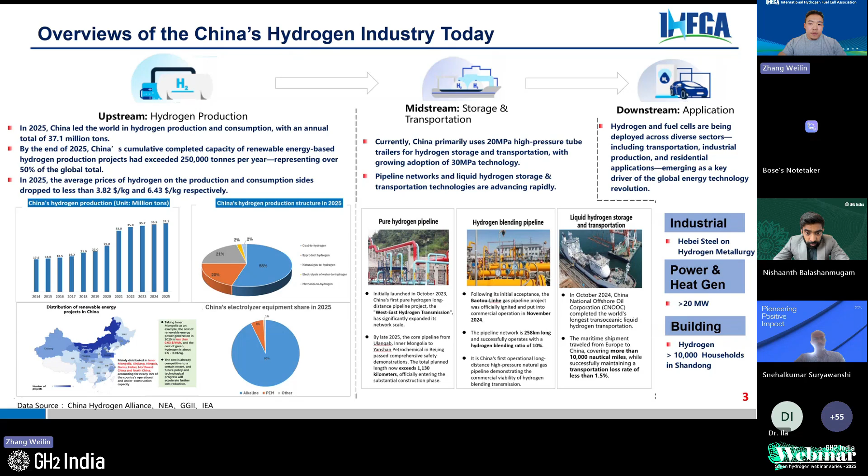In the storage and transportation side, currently China primarily uses 20 megapascal high pressure tube trailers for hydrogen storage and transportation, with growing adoption of 30 megapascal technologies. Pipeline networks and liquid hydrogen storage and transportation technology have advanced rapidly. On the application side, hydrogen fuel cells have been deployed across diverse sectors, including transportation, industrial production, and residential applications, emerging as a key driver of the global energy technology revolution.

Commercial vehicles represent the most critical and challenging segment of the decarbonization of the automotive industry. Fuel cell vehicles, with their extended range and rapid refilling capacities, offer the ideal solution for green, low carbon development in long-haul and heavy-duty transportation.

And here in China, we prioritize the fuel cell commercial vehicle development, emerging as the global leader in the transition. By the end of 2025, the cumulative fuel cell vehicle deployment reaches approximately 39,000 units, representing almost about 34% of the global total. And also in 2025, the sales of the FCVs in total reach over 10,000.

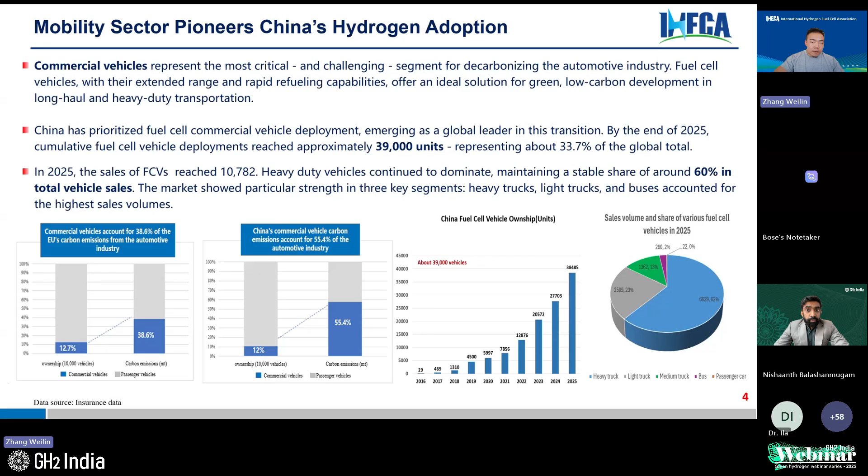Heavy-duty vehicles continue to be the dominator and maintain a stable share of around 60% in total vehicle sales. Also, in recent years, drawing from the experience of major initiatives such as the Beijing Winter Olympics back in 2022, and the Hydrogen into Thousands of Homes program, which is one of the major flagship projects announced here in China.

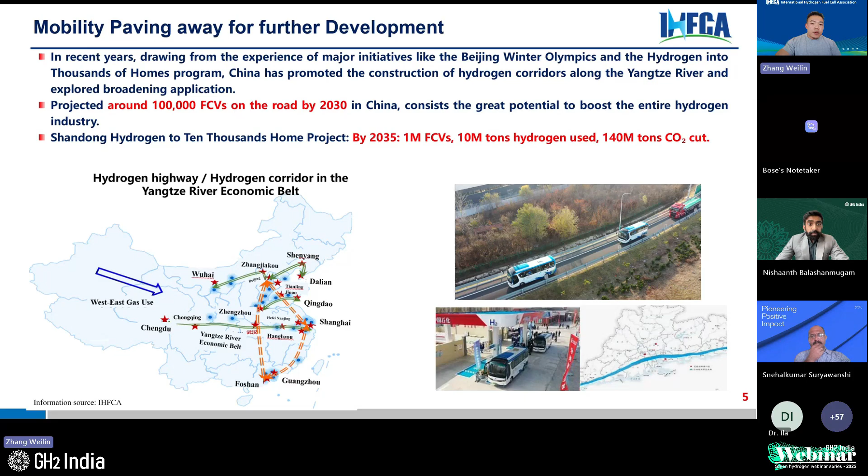We have promoted the construction of the hydrogen corridor along the Yangtze River and explored broadening applications, projecting around 100,000 FCVs on the road by 2030, with great potential to boost the entire hydrogen industry.

In the year 2020, five key ministries announced the notice of launching the demonstration application for fuel cell vehicles. This is one of the very important programs that leads the development of the fuel cell vehicle, and is the very important demonstration project that pretty much helped develop the fuel cell vehicle here in China as it is now, which I will get to with all the details in future slides.

As of early 2026, the participating demonstration city clusters I just introduced have deployed around 27,000 fuel cell vehicles, representing the vast majority of the nation's total deployments. By the end of 2025, the fuel cell vehicle demonstration city clusters consist of 5 city clusters across 44 different cities, and it continues to grow, continuing localized R&D efforts and massive investment momentum, creating powerful synergies.

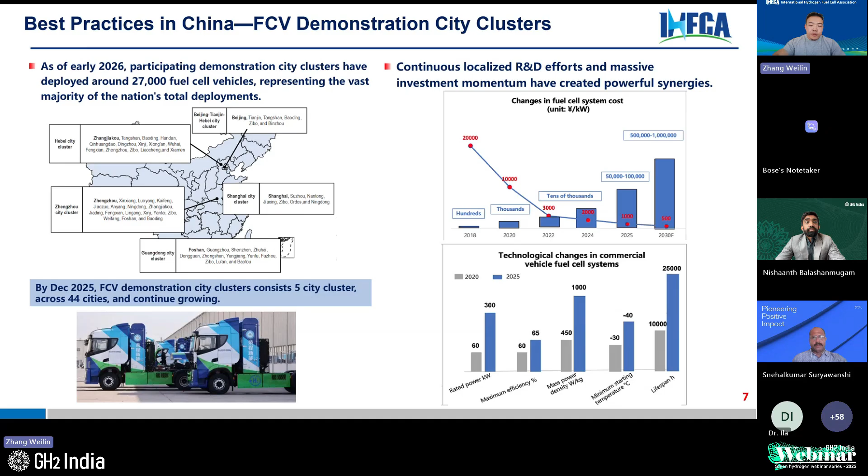The fuel cell system costs have dropped significantly starting in 2020. Also, the technologies in the commercial vehicles field have grown rapidly. For example, parameters such as mass power density or minimum starting temperature have all grown very rapidly, thanks to the demonstration program.

Also, a new round of hydrogen industry development support policy in China was introduced at the same time as the 5-year plan, just last month. As I mentioned in the last webinar, on March 16th, 2026, the China Ministry of Industry and Information Technology, along with the Ministry of Finance and the National Development and Reform Commission, jointly issued the notice on carrying out the comprehensive hydrogen energy application pilot work, marking a major escalation of national support for hydrogen energy industrialization.

There are 6 application tracks. First is fuel cell vehicles, and also green ammonia and methanol, hydrogen-based chemical feedstock substitutions, green steel or hydrogen metallurgy, and also hydrogen blended combustion, and innovative application scenarios.

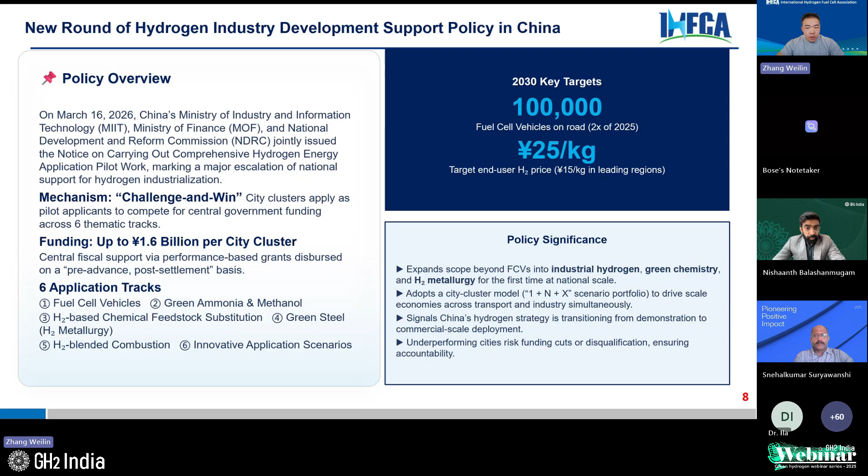There are two major goals by 2030. First is the target of 100,000 fuel cell vehicles on the road, which is twice the target we set in 2025. Also, the target end-use hydrogen price will drop to 25 RMB per kilo.

I would just take a couple minutes to briefly introduce our organization, the International Hydrogen Fuel Cell Association. The IHFCA was officially established in July 2022, and currently we have 111 members from 22 different countries and regions. Over 70% of them are hydrogen and fuel cell companies, and almost 30% are organizations, research institutions, or universities. We're focusing on hydrogen energy, fuel cells, and fuel cell vehicles.

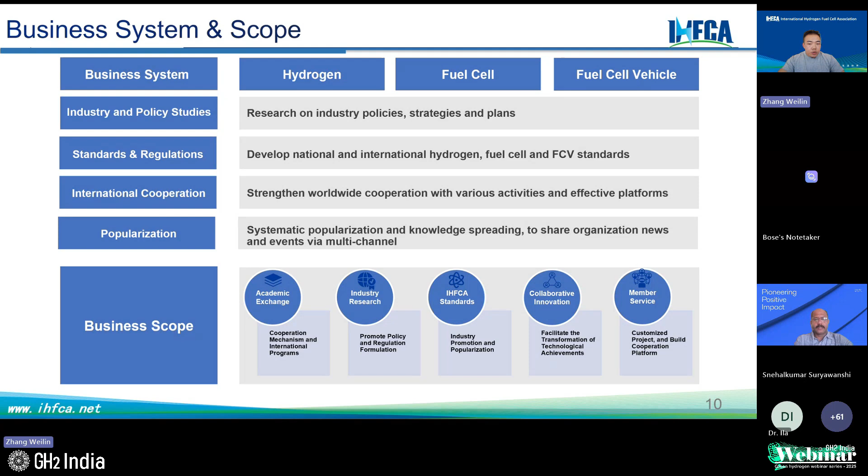Our business scope includes academic exchanges, industry research, IHFCA standardizations, collaborative innovation, and member services. One of our flagship events is called the International Hydrogen and Fuel Cell Vehicle Congress, or FCVC.

Also this year in June, we will have another FCVC take place in Jiangsu, marking the 10th edition of this annual flagship program. And this is one of another very remarkable roadshow.

It's called the Fuel Cell Vehicle Exhibition and Roadshow. We took our IHFCA members' fuel cell vehicles, such as Hyundai's Nexo and Toyota's Mirai, and also domestic brands such as SHPT, to a very famous spot here in Beijing, to show the public what a fuel cell vehicle looks like, that it's very safe, and there's nothing different from other vehicles on the road, showing even little kids that hydrogen energy based vehicles are the future, one of the very important solutions.

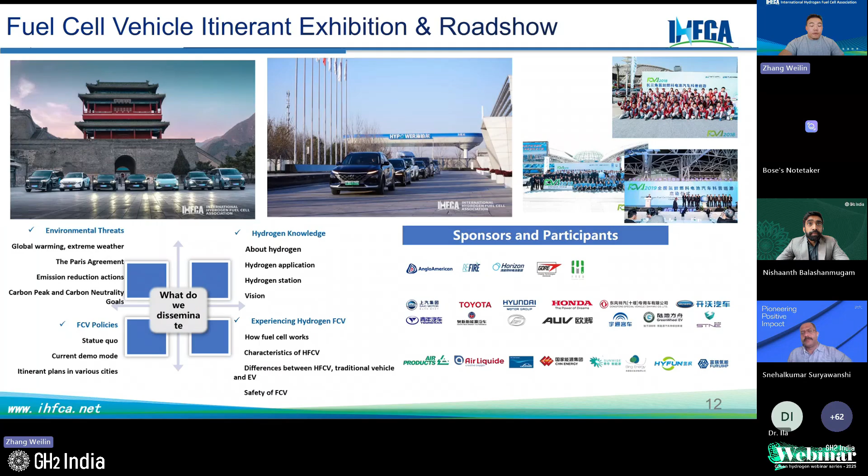Also in 2025, we held 15 meetings annually, including the FCVC 2025 Standardization Working Committee meeting, as well as workshops, seminars, and overseas events.

We have our own overseas meeting brand called Hydrogen Sphere. Last year it was in Paris, and this year we're planning another Hydrogen Sphere in Spain.

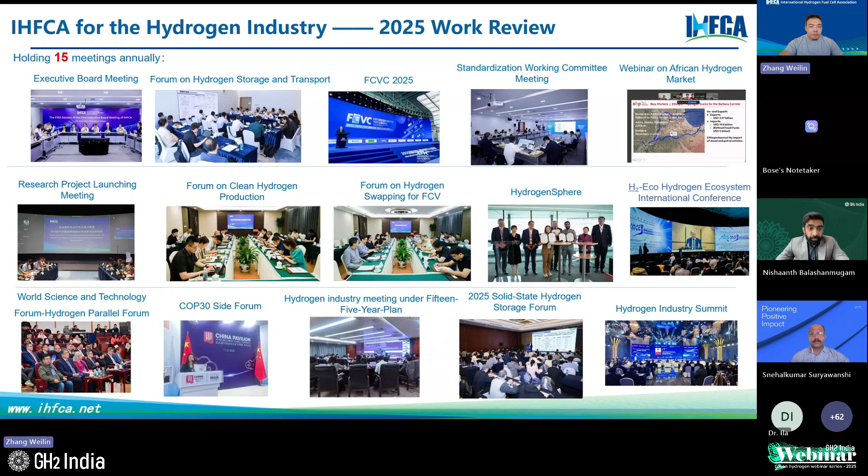This is just another example of our work in 2025. We participated in COP30, in the China Pavilion and other pavilions, as well as Hydrogen Sphere, as shown before. We also publish hydrogen industry reports.

For example, last year we published a report at COP30, and also a Chinese version, which was released at the 2025 Science and Technology Development Forum. The report is called Research on the Application of AI Technology in the Hydrogen Energy Industry. Another report is called Hydrogen Storage, Transportation, and Utilization Development Status, Key Challenges, and Strategic Opportunities.

We also provide other reports to the government and to the public, serving the role of a think tank.

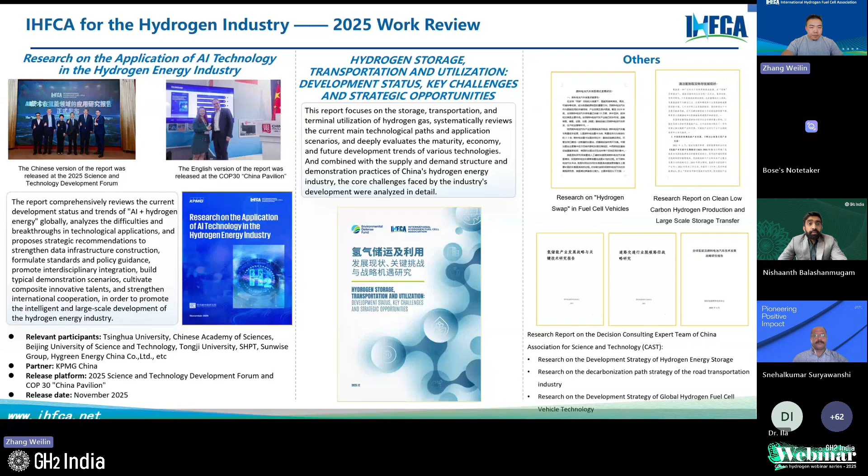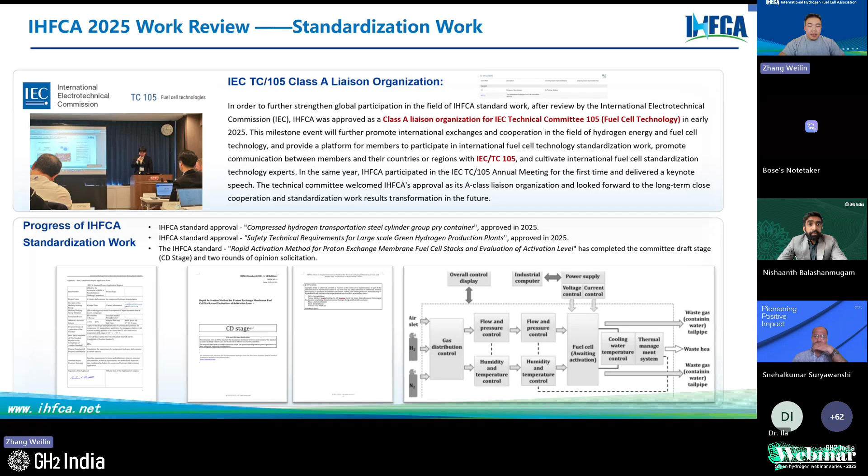As for our standardization work, the IHFCA Standardization Working Committee was successfully established in 2024 in Korea. It's worth mentioning that we are also the Class A liaison organization for IEC Technical Committee 105, focusing on fuel cell technology, and the Class A liaison organization for ISO Technical Committee 197. That concludes my presentation. Thank you very much.

Excellent. Thank you very much, very nice. Thank you. Are there any questions, or do you want to save all the questions for the Q&A session?

I just posted one question in the chat box. I was curious to know how the HRS, hydrogen refilling station infrastructure, is set up on public roads, and whether the gas is transported or generated on site.

You mean the HRS infrastructure on public refilling stations? The development status currently right now in China? No, in terms of so many fuel cell vehicles on the road, is the hydrogen generated at the refilling station nearby, or is the gas transported? Okay, if I'm not clear, maybe we can discuss offline. Yes, Nish, over to you. I'm sorry, I'm trying to understand the question. So, oh okay, I think I understand the question now.

So yes, one of the major goals for the development of HRS is to actually produce the hydrogen inside the HRS, which can cut the cost significantly. Of course, that would be the ideal solution, but currently that's not how it goes here in China. We still require 20 megapascal long tube trailers to transport the hydrogen gas to the HRS, and all the HRS are built around major cities, but not in the downtown area, due to safety concerns. For example, where IHFCA is located, it's far away from downtown Beijing, and we do have several HRS built around us because it's far from downtown. So all the commercial fuel cell vehicles or passenger vehicles need to refill hydrogen here at the HRS every day, far away from downtown. And that's pretty much how it goes in every major city in China now.

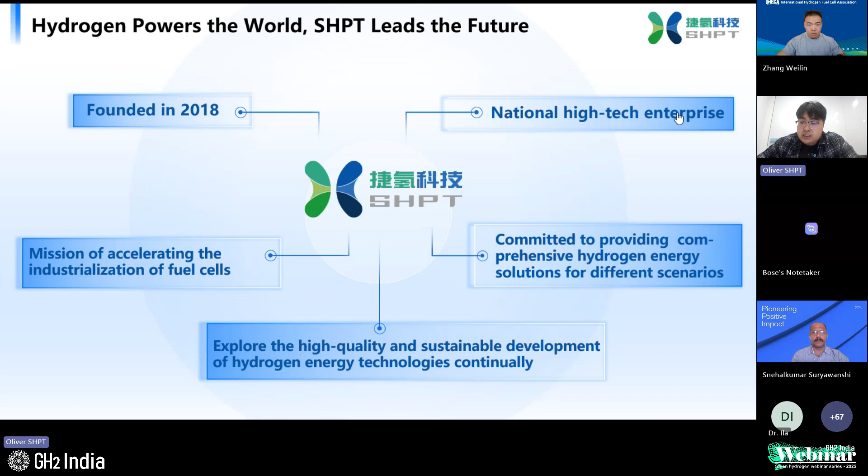We belong to SAIC, Shanghai Automotive Industry Corporation group, and were founded in 2018. Before that, from 2001, we were one of the departments focused on fuel cells within SAIC, so we have over 25 years of experience in fuel cell systems.

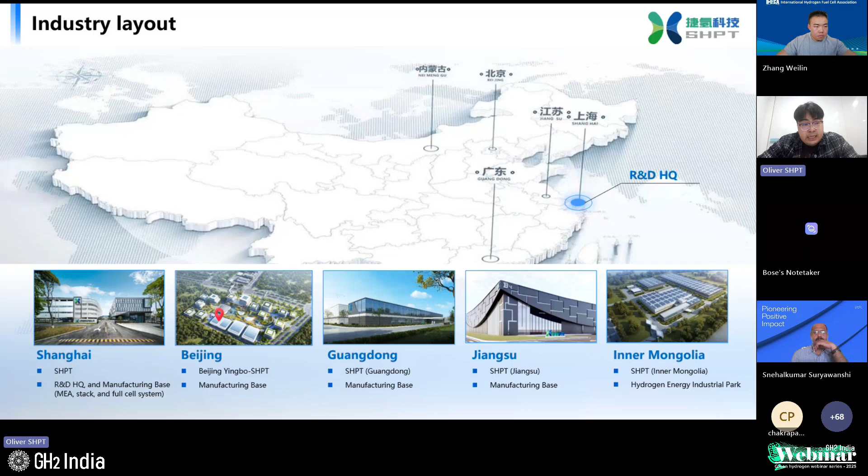We have a total of 5 bases in China. The headquarters is in Shanghai, where we have our R&D office and manufacturing base. We can manufacture MEA, fuel cell stacks, and fuel cell systems in Shanghai, and we have another 4 sites in Beijing, Guangdong, Jiangsu, and Inner Mongolia.

We apply our technology not only in transportation scenarios but also in power generation. We have already obtained more than 145 key patents and qualifications in China, more than 100 awards issued by authoritative organizations, and more than 45 government awards.

Today I will cover three parts to introduce SHPT: first, our R&D innovation; second, our manufacturing innovation; and last, our application innovation.

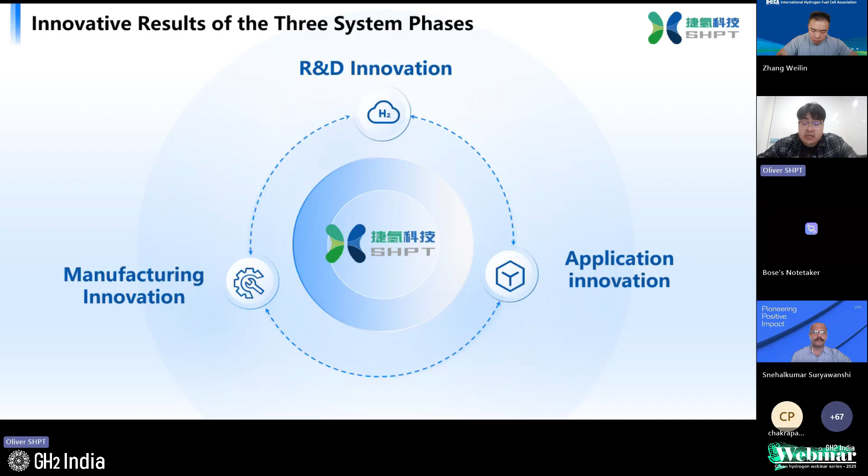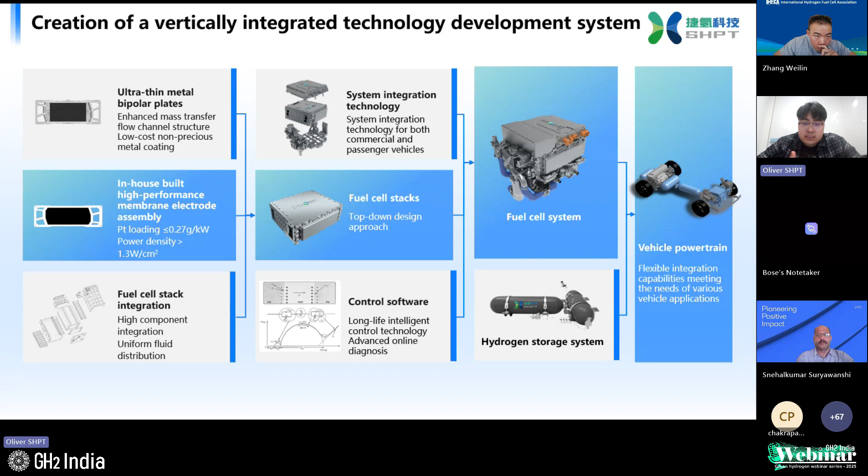This shows the creation of our product. You can see this vertical integration line, where we produce everything from the MEA to the whole vehicle powertrain. In the middle are the fuel cell stack and fuel cell system, which we design and manufacture ourselves.

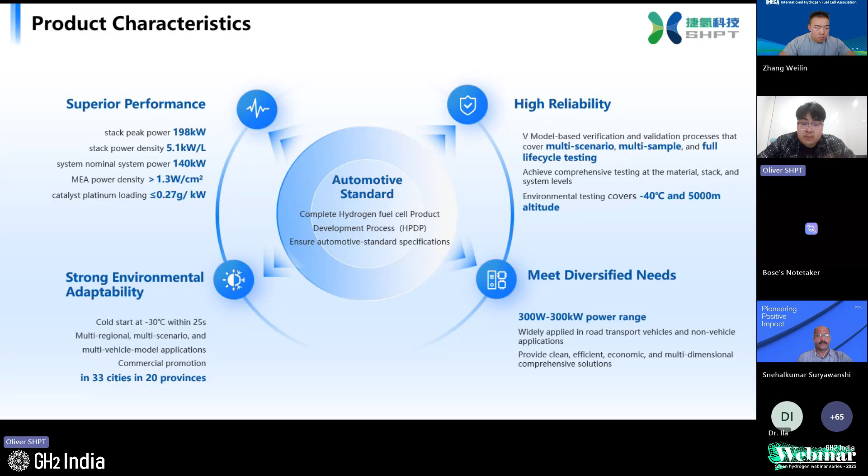Next are our product characteristics. First is performance: our stack peak power is 198 kilowatts, and the stack power density is 5.1 kilowatts per liter for this type of product. Currently, our maximum stack power is about 300 kilowatts, and the lowest is about 300 watts, which is used in two-wheelers—I'll introduce that in a future slide.

This is our product portfolio. You can see we manufacture products ranging from 300 watts to 300 kilowatts, including both air-cooled and liquid-cooled systems, mostly used in transportation scenarios.

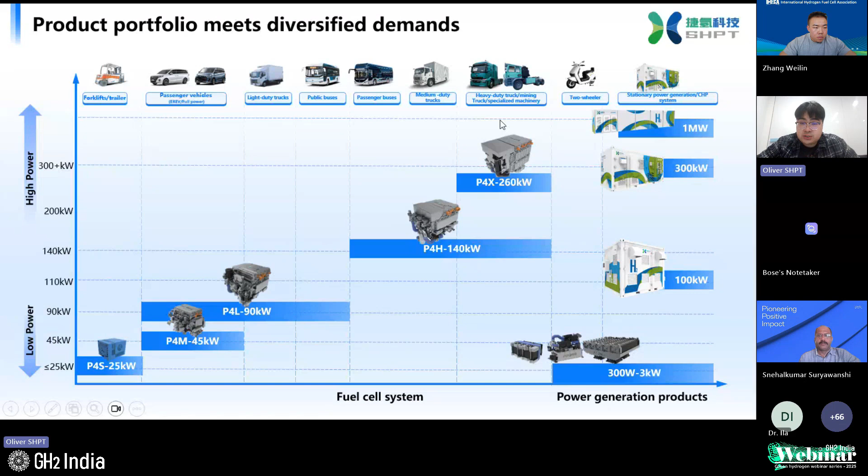This shows the history from our first mass-produced MIFA to our latest launch in 2024, the REHV, which is used in the powertrain of a ROEWE.

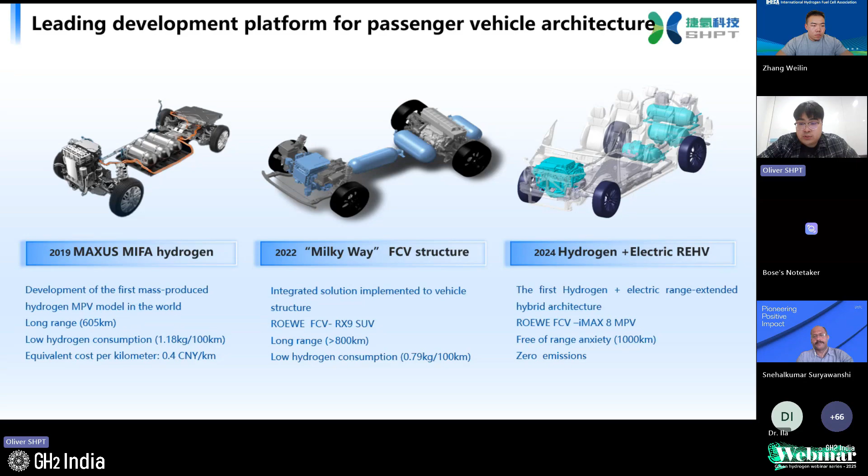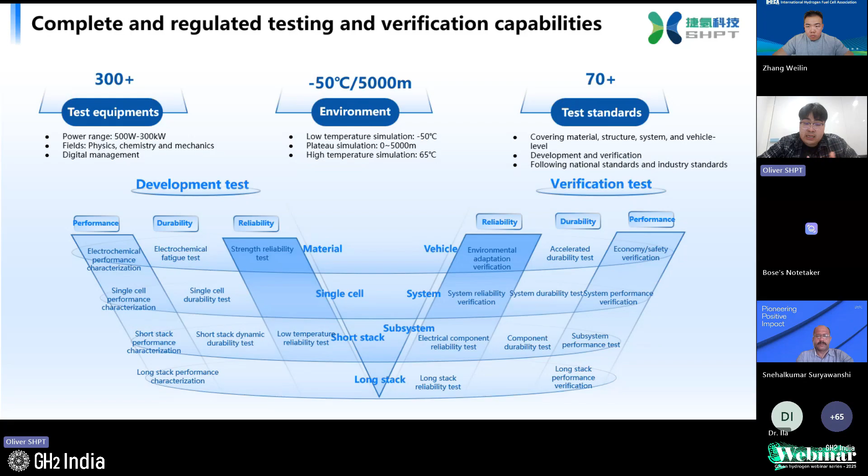We also have one of the most advanced laboratories in the hydrogen industry in China, with more than 300 testing equipment units covering a power range of 500 watts to 300 kilowatts. Our laboratory also has environmental testing equipment that can simulate minus 50 degrees and altitudes up to 5,000 meters. We lead more than 70 testing standards, testing everything from long stacks and short stacks to single cells and materials.

This is an introduction with videos of our factory. Our first floor of the manufacturing base is dedicated to making the fuel cell stack.

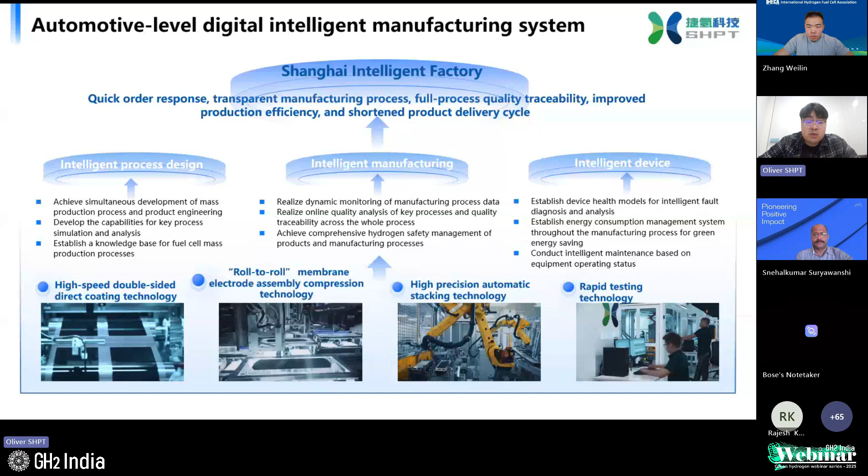100% of our stack manufacturing uses high precision automatic stacking technology. On the second floor, we manufacture the MEA ourselves, using high-speed double-side direct coating technology and roll-to-roll MEA assembling compression technology.

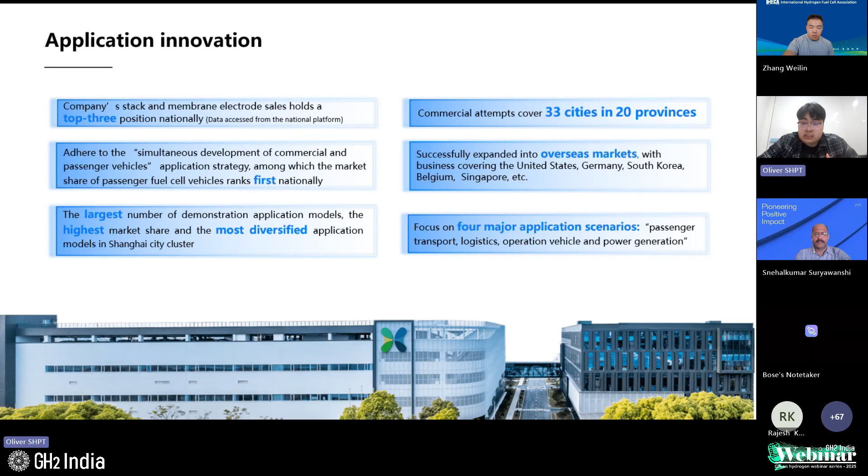Next is our application innovation. We have already participated in projects in 33 cities across 20 provinces in China, and we have successfully expanded to overseas markets including Europe, the United States, Southeast Asia, and the Middle East.

This is the passenger transportation scenario we have already done in the Chinese market. Firstly is the hydrogen bus and passenger vehicles. This passenger vehicle is the MIFA, which I introduced before, and this is used in the Hongqiao Airport as a Uber.

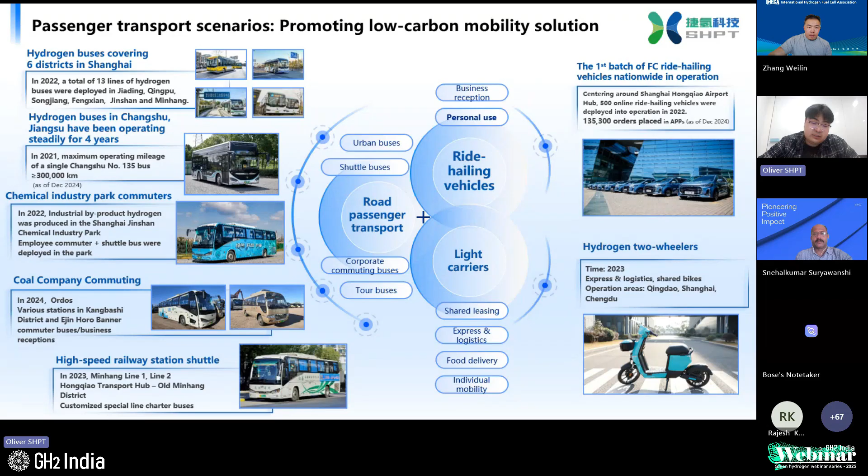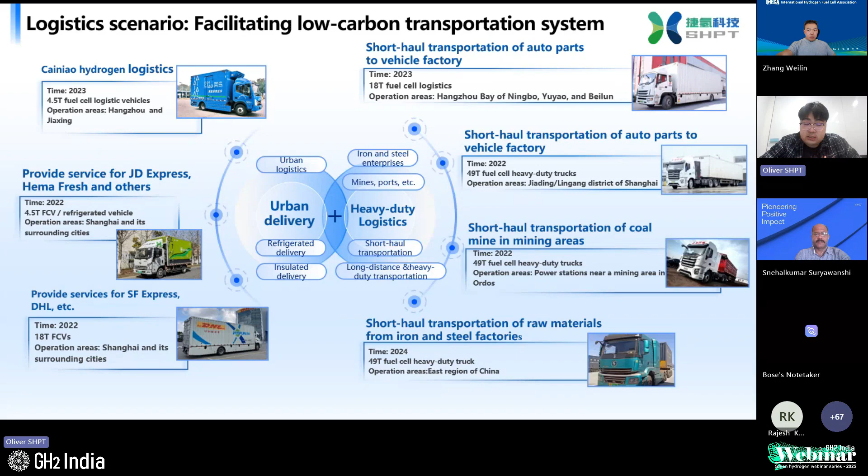Also in 2023, we launched our two-wheelers, which use 300 watt fuel cell stack systems in Chengdu, Shanghai, and Qingdao. Then is the logistics scenario. We can manufacture our fuel cell stacks to integrate with 4.5 tons to 49 tons different kinds of heavy duty trucks, mainly using 90 kilowatt to 260 kilowatt fuel cell systems to meet the different needs of the customer and the powertrain.

Then is the power generation scenario. These days power generation is more and more popular than before, and we have already participated in several big projects in China and also in the overseas market. The biggest one is our cooperation with China Southern Power Grid, about 2.5 megawatts. This is a demonstration project which supplies the power needs of 250 households.

We have also done one project in Egypt, which is the power supply, a UPS power supply for the data center for Vodafone.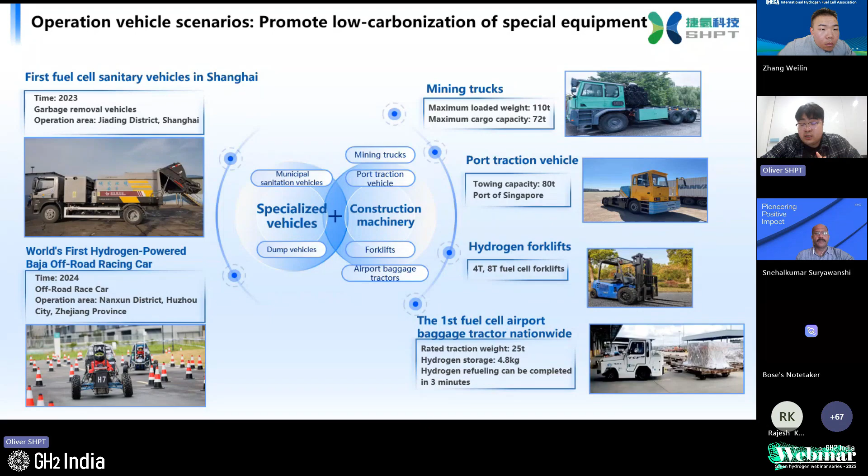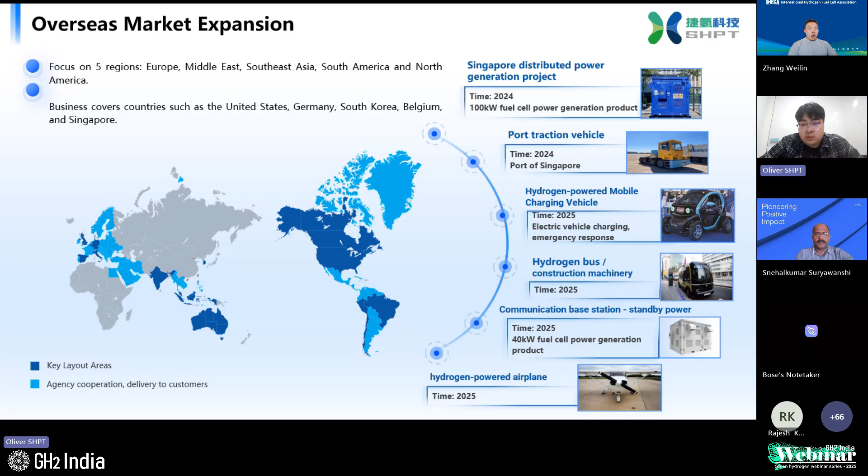Then we can talk about our overseas market. We are very willing to participate in one of the most active markets in the world, the Indian market, and we already have some cooperators there, and we're willing to know more about the Indian market. We also actively build our ecosystem from hydrogen storage, hydrogen transportation, powertrain, and power generation companies. We are willing to build ecosystems with our friends in the overseas market.

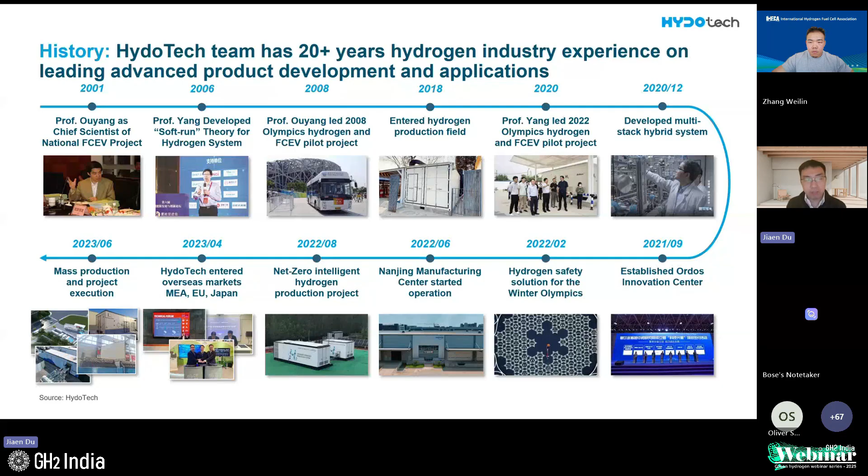With the key technologies incubated from the research group, we launched our first project in 2022. Since 2023, we started to go abroad and start mass production in China and outside of China. For now, we already have around 600 megawatts of electrolyzers operating and in construction, which is already taking quite a share of the market.

One of the key projects I want to introduce today is the Goldwind and Maersk Green Methanol project. We are the only electrolyzer provider for this project. This one is producing green methanol in the north part of China and have secured the offtake from Maersk, Hapag-Lloyd, and all these shipping companies. So that will be the first commercialized green hydrogen as well as green methanol project in the world.

The key value we provided is we are able to bring down the LCOH from this project to $2 per kilogram. So this is the ship that is already in place, and by end of September this year, these ships will start using our fuel from our project.

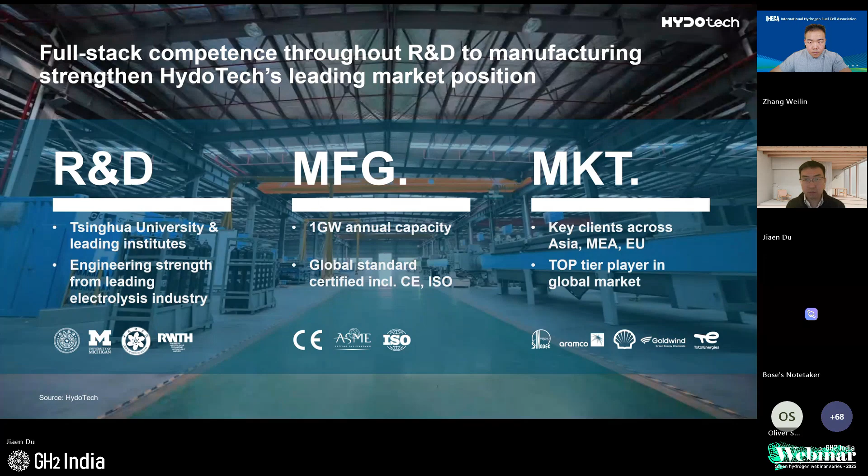Coming back, our company now has a very full competence from R&D to manufacturing, and also a top tier performance in the market. This is our factory with a 1 gigawatt capacity per year, and we have obtained the full international standards for our products, including CE and ISO and ASME. So quite ready for the Indian market, I would say.

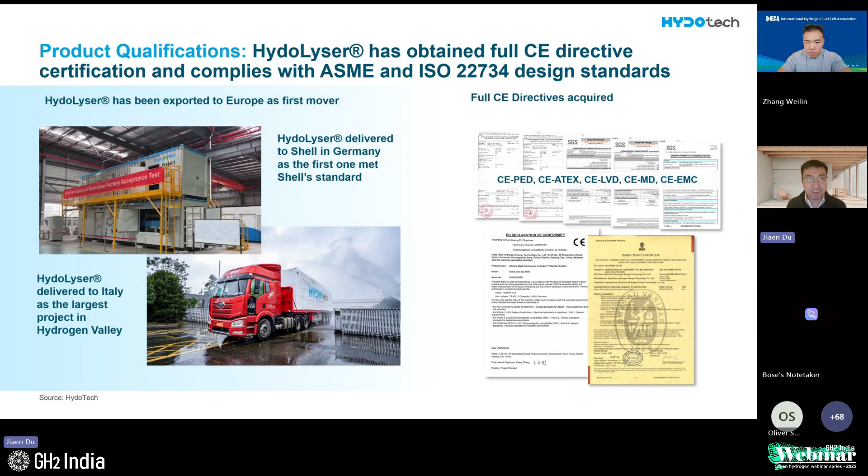And of course, we are always collaborating and partnering with global energy leaders to make the green hydrogen as well as the green fuel industry coming true.

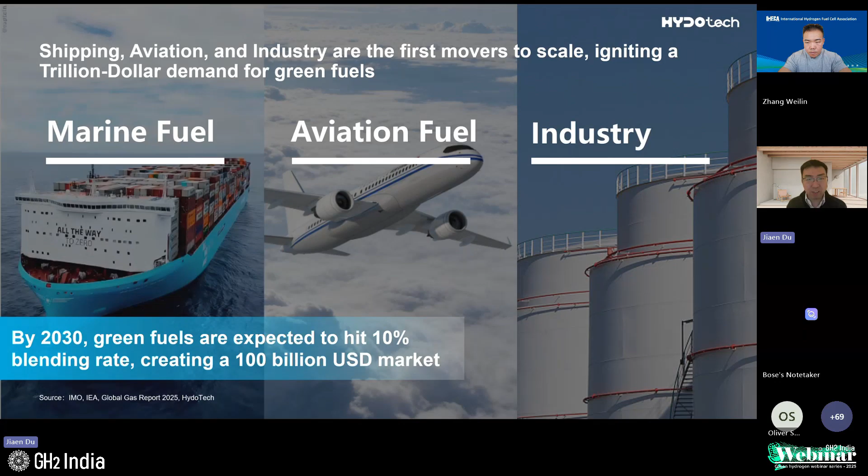Second, I want to use some time to share our thoughts on the green hydrogen and green fuel market. From the scenario of green fuel, we are facing a very large potential from the end user market. Only for these three - maritime, aviation, and industry decarbonization - we are talking about around over 100 billion US dollar markets by the next 5 years.

But if we're looking back in the past 5 years, what happened? We all know because of the expensive equipment as well as the LCOH, it is very hard to make green hydrogen projects commercially work. That is, we think, the largest hurdle in front of us.

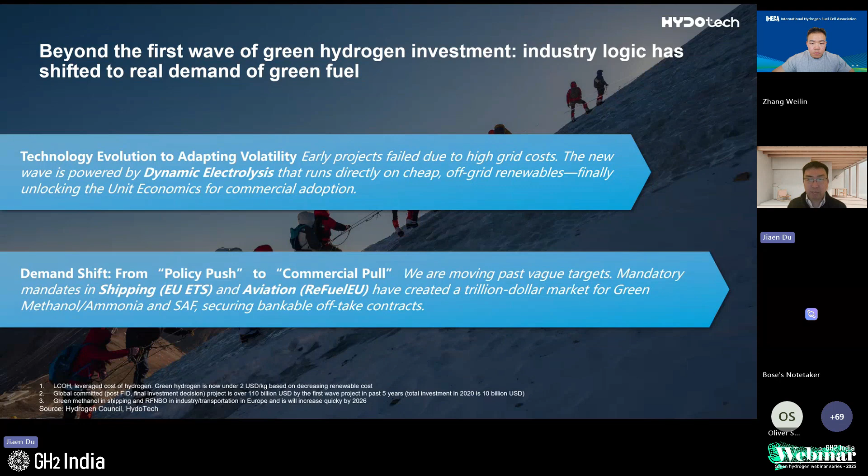What we see is actually the technology has largely been adopted and iterated in the past 5 years, and we are seeing a very clear trend from the policy side to pull for the realization of green fuels. So we believe green fuel will be the first sector that can be commercialized in the next 5 years, and then with the decrease of costs along the whole value chain, all the other scenarios will be opened. So this is what we see the market is doing.

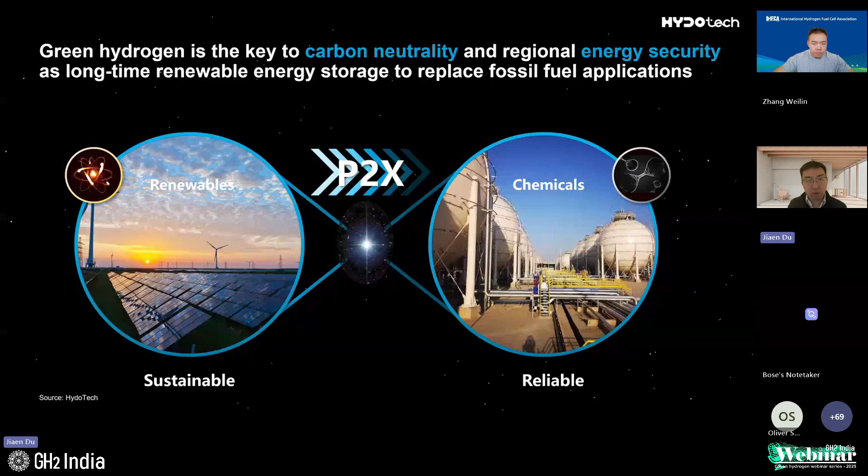So we are actually converting green electrons to green molecules. In the middle is what we think our core technology lies - the dynamic electrolysis. Only by being able to use the fluctuated power to produce hydrogen are we able to decrease the hydrogen cost. So what we're seeing is a lot of challenges everyone knows about the traditional alkaline electrolyzer.

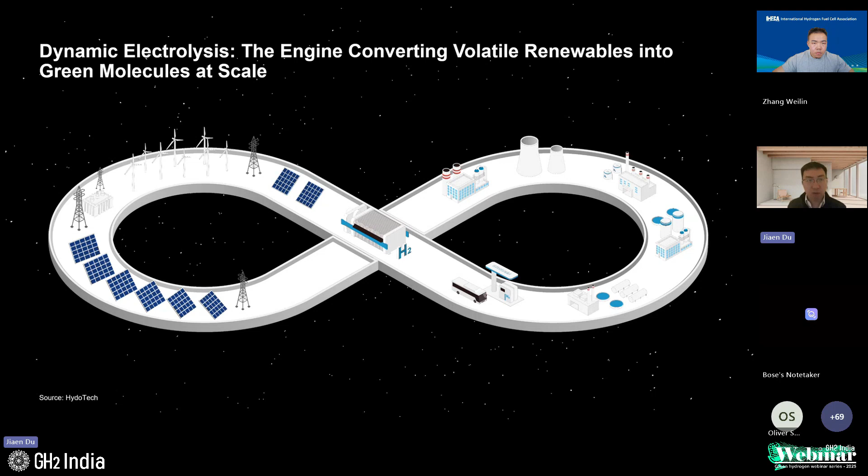I will not go into details, but to solve this, we need a whole innovation from the technology level. So this is our core technology - we are reinventing the alkaline technology. We call that advanced alkaline. From the cell level, we have the square-shaped design, and from the stack level, we use cartridge stack to minimize the OPEX for lifetime.

And then we have our in-house AI smart platform to monitor and do remote diagnosis to further decrease cost and be better adapted to the fluctuated power.

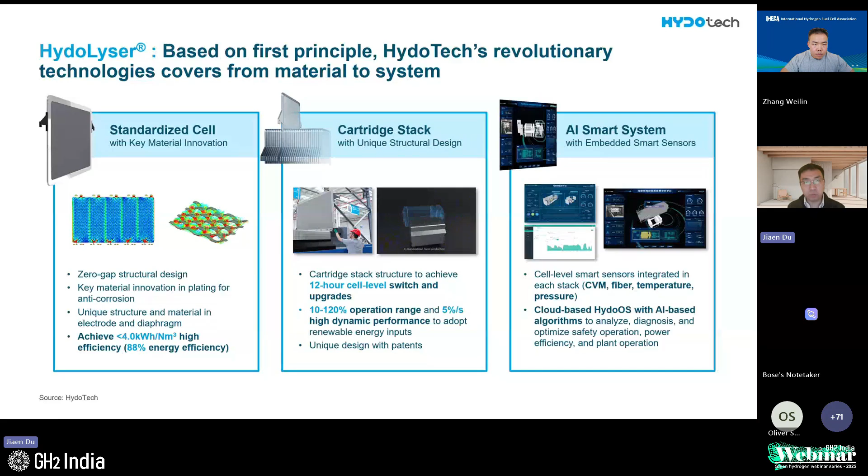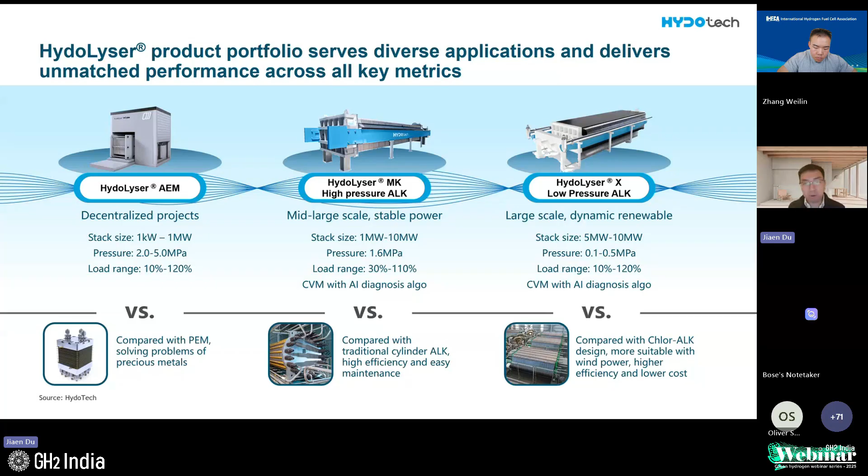So this is our portfolio. We are providing the equipment. From equipment level, we are providing from AEM to high pressure alkaline as well as low pressure alkaline. Based on this, we are also launching the solution for the green hydrogen plant.

So this is exactly the plant we are constructing for the Goldwind project, for the 500 megawatt green methanol project. We are very proud that each unit is modularized and with a very low power consumption, and we are also taking great care on the O&M part to really decrease the lifetime LCOH.

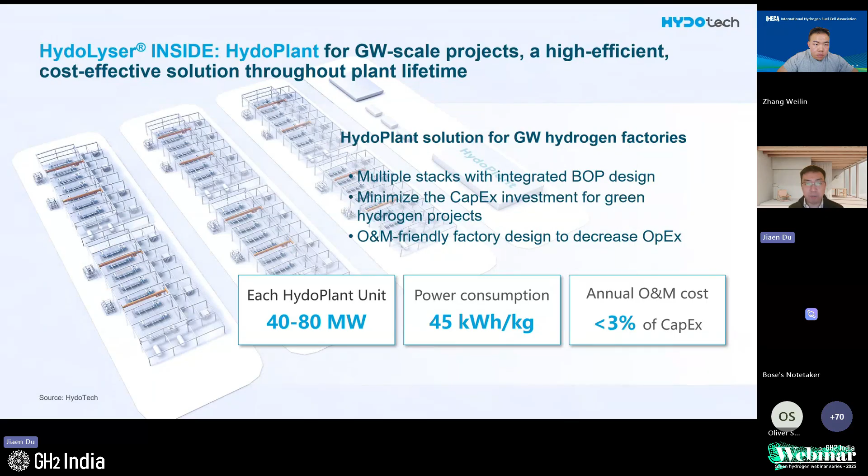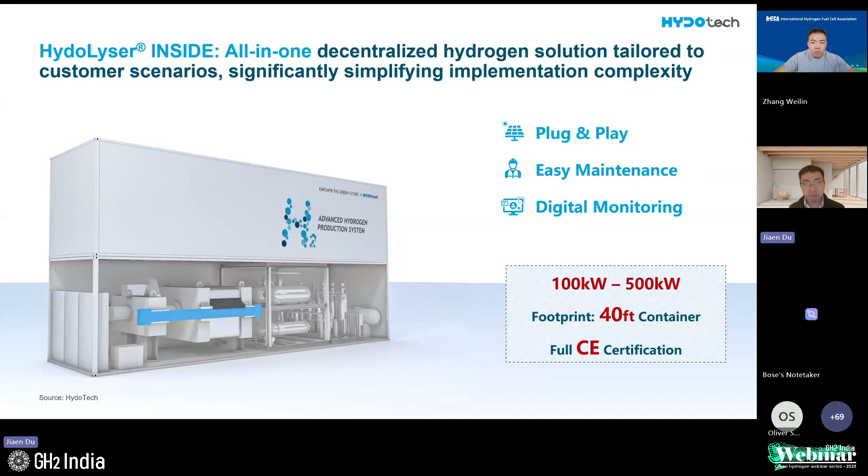And also we are exploring some very interesting scenarios with different partners, like cement company decarbonization, and also green steel, as well as some green hydrogen energy storage system in the Europe part.

So quickly summarize, we are very happy to participate in the meeting today. We already noticed that India has a large potential because you have very good solar and renewable resources. So with our technology, we believe we can make the green hydrogen and green fuel industry coming through a bit quicker.

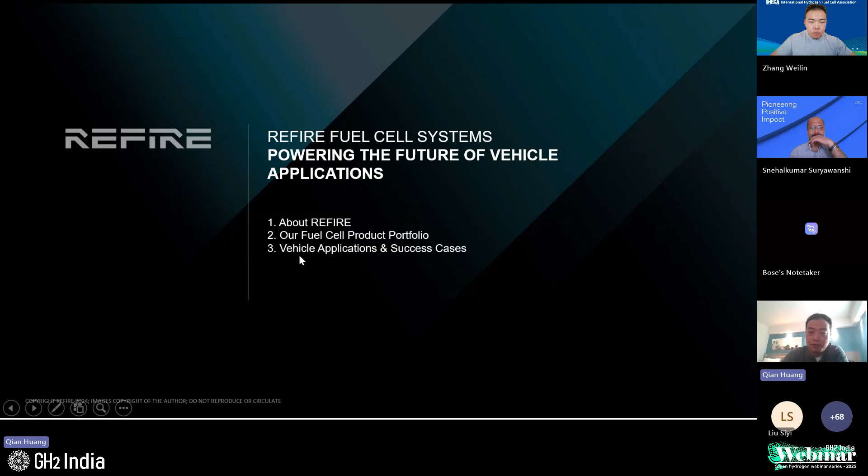Refire was founded in 2015 with a single and pure purpose: to accelerate a sustainable future with hydrogen technology. We listed in Hong Kong in 2024, and we have more than 400 employees, including 169 R&D professionals operating out of 2 R&D centers and 3 manufacturing plants.

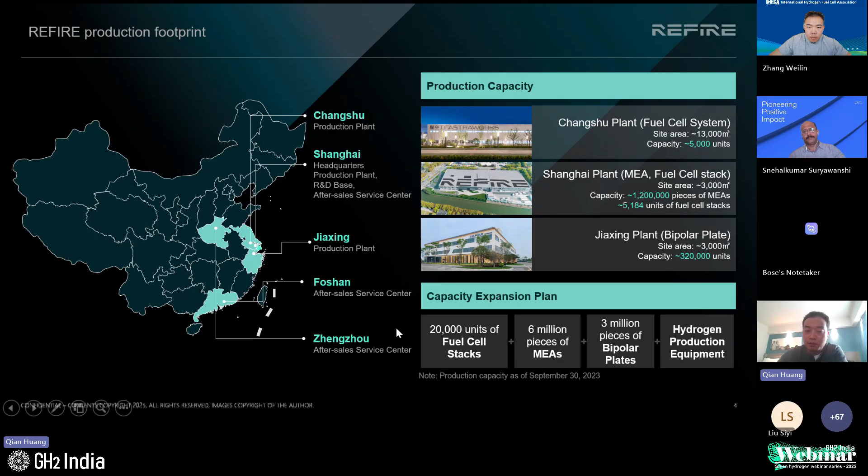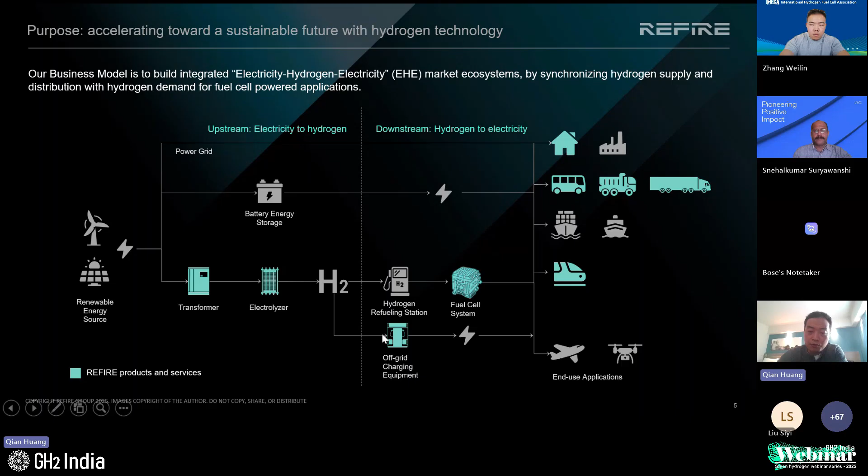Our business model is built with the idea of electricity-hydrogen-electricity ecosystem. So the green parts here are the parts that Refire supplies. There are transformer electrolyzers that connect to the upstream, and there are fuel cell systems and off-grid superchargers that connect to the downstream applications.

Today I will focus on our fuel cell system products. Our product line spans from 80 kilowatt system to 220 kilowatt system. The 80 kilowatt system is mainly for light-duty trucks and city buses, the 110 and 130 kilowatt systems are for medium-duty trucks and coach buses, and the 180 to 220 kilowatt system is for heavy-duty trucks.

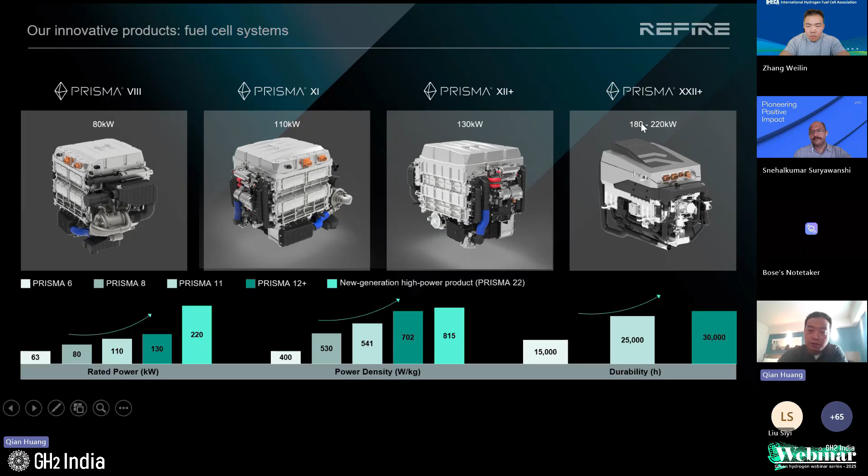So let's have a closer look at the big brother of our products. This is a platform product, with power range from 180 to 220 kilowatts. This is already with E-mark and available, and already applied overseas.

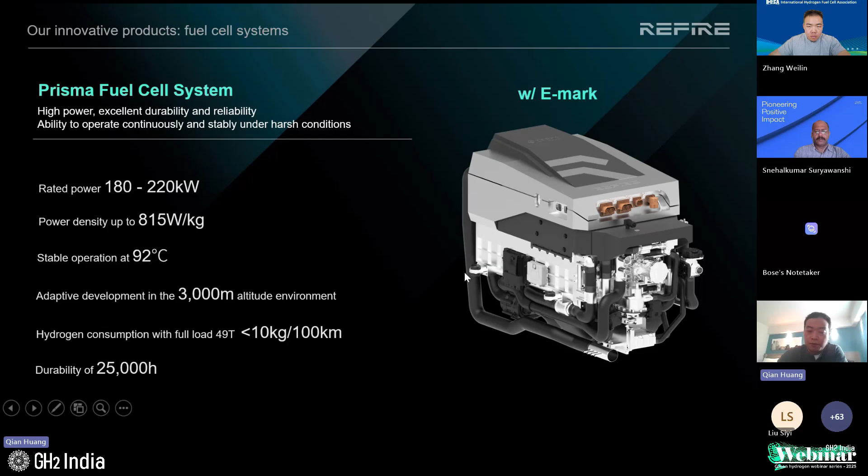Power density is up to more than 800, and we're able to operate stably with a cooling temperature of 92 degrees Celsius, which makes it easier for the heat dissipation designs for heavy-duty trucks. The ambient temperature can range from -30 to +50 degrees Celsius, and it's fully validated at a high altitude of above 3,000 meters. This is hydrogen consumption from real road operation in the field, with a full load of 49 tons, less than 10 kilos per 100 kilometers, and with a durability of 25,000 hours.

So technology is only meaningful when you apply it. Basically, Refire is global number one in terms of fuel cell vehicle prototypes and commercial fleets. We have made more than 200 prototype engineering projects. Here are some examples of the mobility applications, from city buses, coach buses, light-duty trucks, medium-duty trucks, municipal sanitation vehicles, heavy-duty trucks, and container transportation.

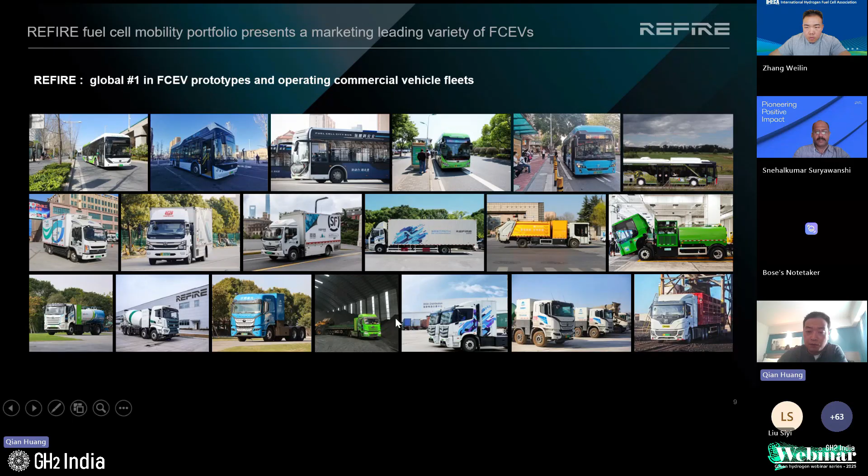There are some numbers for your reference. By end of 2024, we delivered more than 9,000 fuel cell system units, and 7,000 of them are deployed for mobilities. The accumulated mileage of our fuel cell mobilities is more than 300 million kilometers by end of 2024, and now it's already 400 million kilometers. Out of more or less 700 million kilometers of the total fuel cell mobility mileage of China, we count about 65%.

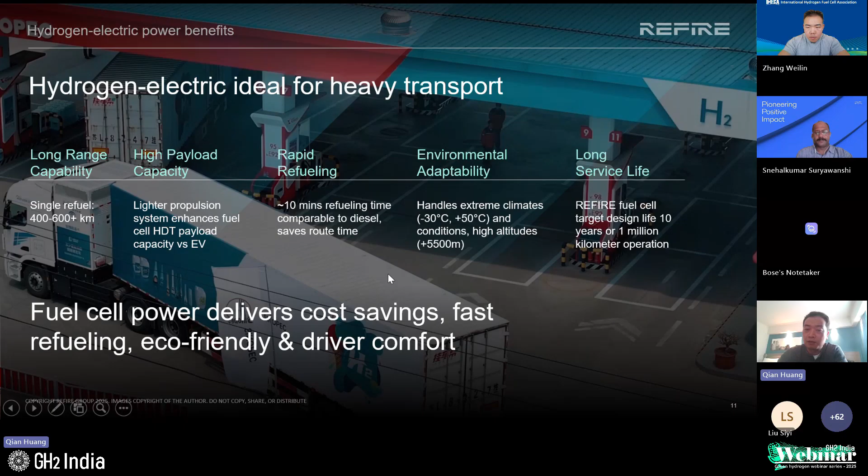In terms of heavy-duty trucks market, we have a market share of 42% in China. We believe heavy-duty truck applications would be the pioneer market for real fuel cell applications. Comparing with BEV applications, we're able to get longer range, higher payload, faster refueling, better environmental adaptability from -30 to +50 degrees, and a longer service life.

Here is an example of the use case in China. We have a fleet of 50 vehicles of 49-ton heavy-duty trucks in North China. It's really heavy use there, and we deployed them since 2022 - it's been over 300,000 kilometers per truck already. You can see it's really difficult conditions there, harsh air conditions, and also a very hilly area.

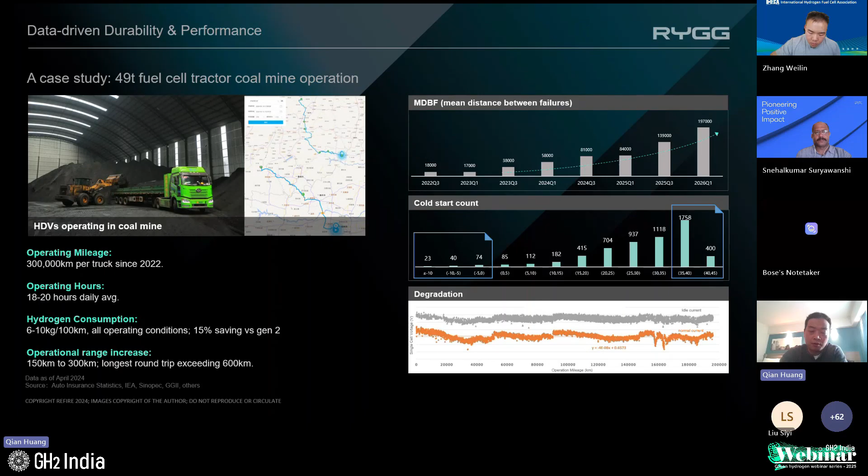This hydrogen consumption data is also from real operation in the field, and it's 15% better than the previous generation. You can also see that even in this very tough condition, the system performance is quite stable - the degradation of performance is within 2% at the first 200,000 kilometers. Since we are able to survive in this kind of situation, we are pretty confident we can perform well in any other applications.

As of mid-2025, there are more than 3,500 heavy-duty trucks already deployed with ReFire fuel cell systems.

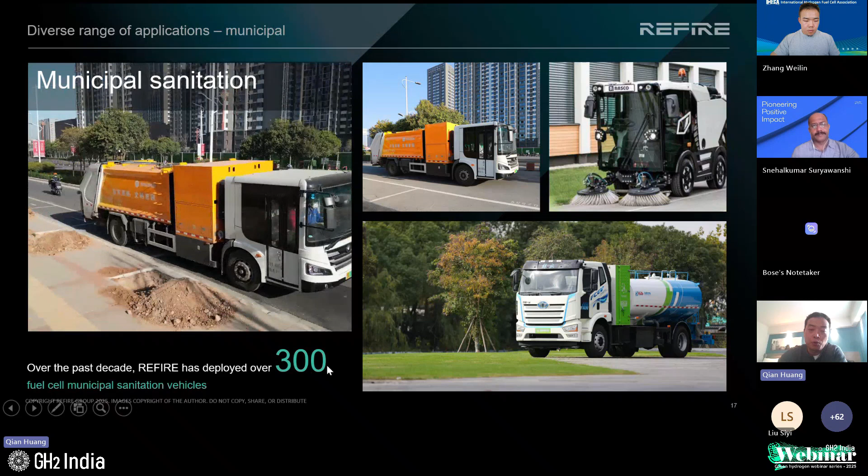There are more cases for municipal sanitation, like sweepers and garbage trucks. Over the past decade, ReFire has also deployed more than 300 municipal applications. And more applications like mining trucks.

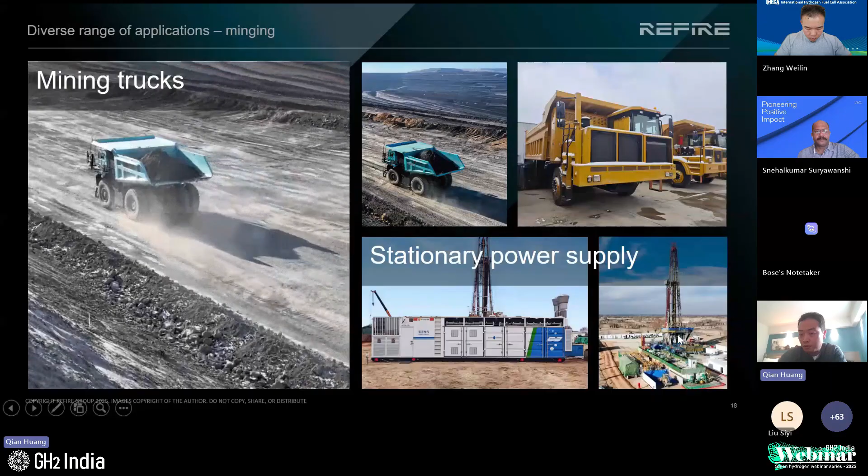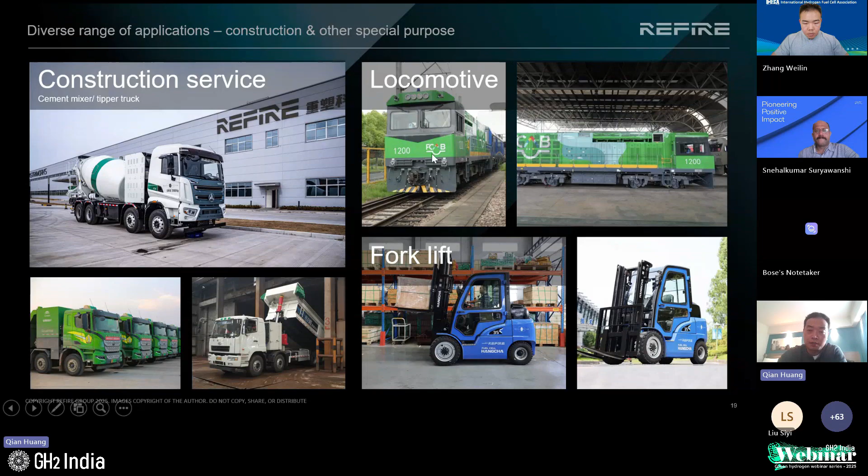This is a 110-ton mining truck - we work with Caterpillar as well. Also this is a stationary power genset application with power 1.5 megawatts at a remote area, actually deployed by Sinopetrol for a drilling site. Construction services as well, and this is a locomotive application in Chile with ReFire systems inside, and forklift applications as well.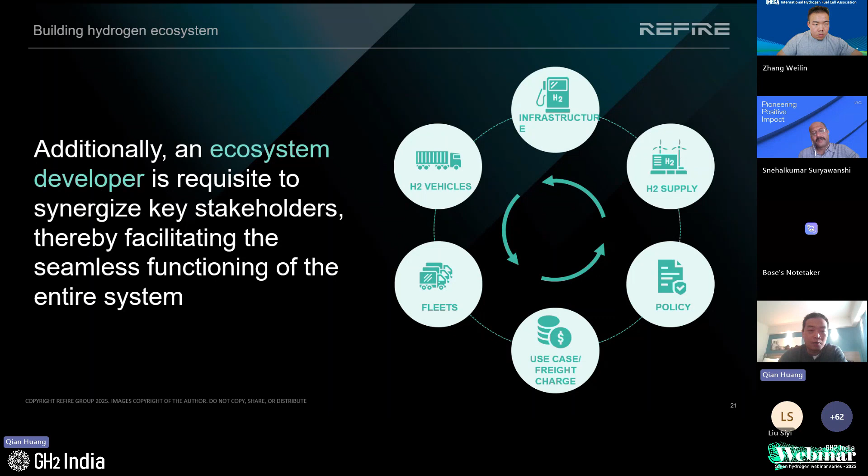To have success in the hydrogen industry, it requires what we call a 6-pillar ecosystem, including infrastructure, hydrogen supply, policy, use cases, fleets, and hydrogen vehicles. ReFire is now committing to work with all our friends and partners to make that happen.

Thank you. This is all from me today, and we can have more open discussion later in the meeting.